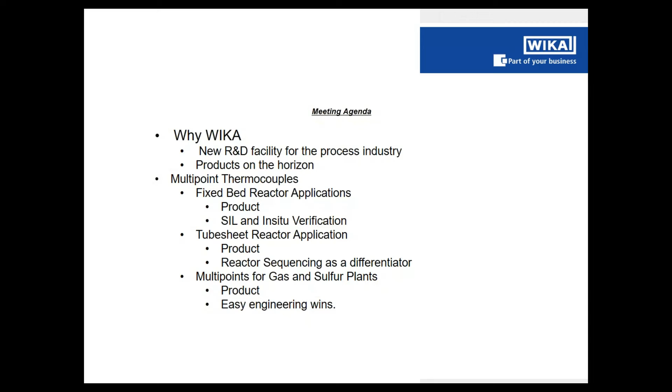Then we'll talk about a product line, the tube sheet reactor application, multi-points for those, which tend to be very prevalent in a lot of our chemical applications, and the things that need to be thought about and why we can do that pretty well. Then I'll end with an easy one, multi-points for gas and sulfur plants, specifically amine. There's one we do that's really easy, and especially if you have some young engineers and happen to have an amine plant attached, there's an energy efficiency project we can put together for a quick, easy engineering win for those folks.

So just a recap - a lot of you will know WIKA. WIKA is one of the largest instrumentation manufacturers in the world. Certainly we're known for mechanical pressure gauges, but also have significant lines in temperature, level, flow, force, and now density. I'm with the temperature division, and that's where my level of expertise is. I can talk a little to the other ones, but temperature is really my specialty.

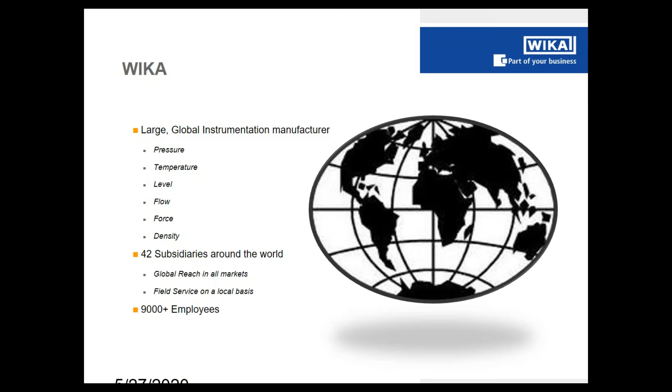We are a global organization, lots of subsidiaries around the world - 42 subsidiaries, 75 offices around the world, more than 9,000 employees. So we have a lot of resources in a lot of spots to draw upon, and that means we have a very substantial presence here in the Americas. So anything we can't handle, we have lots of friends around the world that can add capacity to allow us to do so.

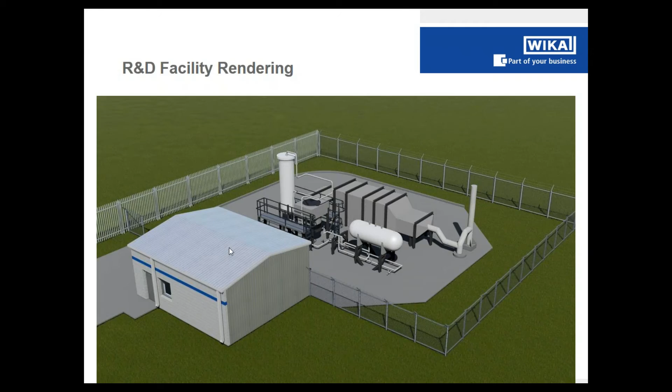We do probably 30 to 40 turnarounds a year. We'll run Monday, come down Tuesday, do some analysis, and do another test Wednesday, Thursday. So we're really able to do some interesting things.

We'll be doing a lot of work on problem installations and common mistakes. We get a lot of calls from customers saying, 'Hey, I did this myself, I know I did it wrong, how bad is it?' And right now my answer is usually, 'Oh, that's bad,' which isn't very helpful. What you'd like to know, especially when we're talking about temperature, is whether it's a 10-degree error or a 100-degree error. Can I live with it, or do I need to do something about it? With this unit, we're going to recreate those scenarios over a variety of heat fluxes and operating conditions, so when you call, we can matrix that and say, okay, under similar conditions we got 26 degrees, to help you make better decisions.

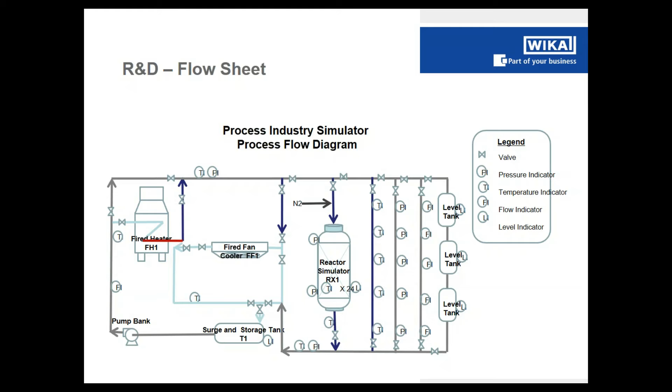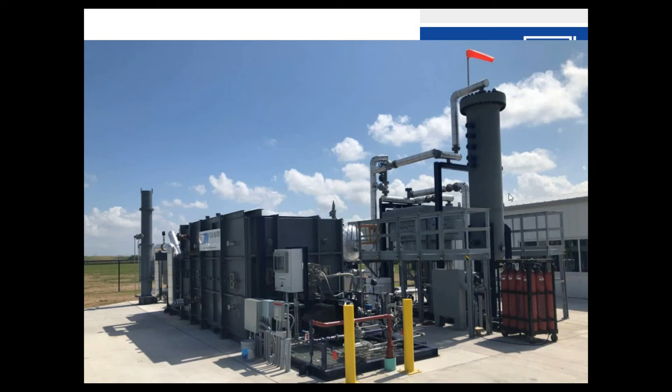Here you can see the reactor skid and the fixed bed before it got insulated. This is a side view of that heater. Again, Tulsa Heater was a partner, and here is our heat transfer fluid that we run through it - we actually boil oil, and Dow is a partner. We use the high temperature heat transfer fluid from Dow, who helped us out with that. We had a lot of really good, talented people add their expertise to make this a very efficient unit.

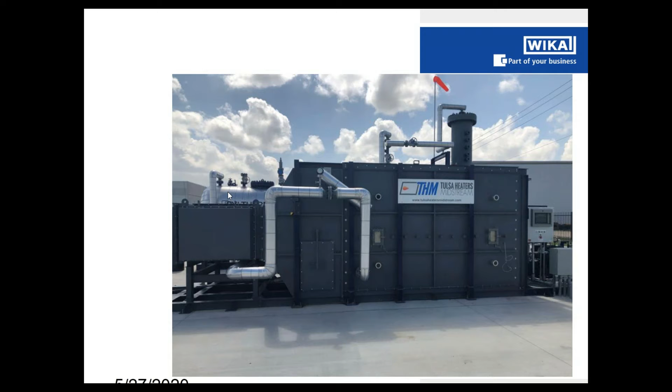And we are looking for partners. We don't do full utilization of this unit - certainly we've got a lot of tests that we do, but if this is something that could be useful to you or your company, and you'd be interested in talking about a test, please get in touch with me, or get in touch with Rick. He can put you in touch with me as well, and let's discuss it, because we're looking at advancing not only our knowledge, but knowledge in the industry. You know, this kind of stuff benefits us all.

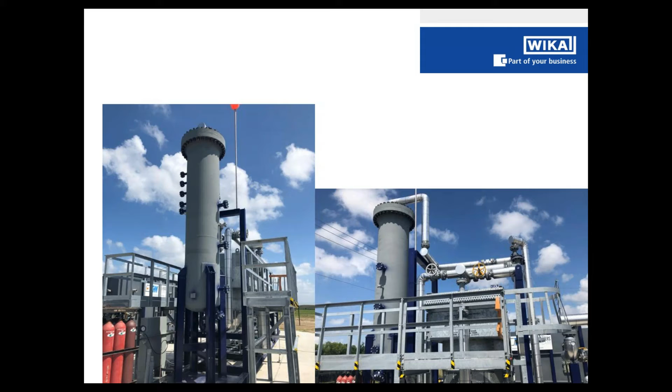Coming to you right now, we're doing a lot of work on external skins, both welded versions and removable. We've got some great things coming out in the next 6 to 18 months—multipoints we're going to talk about today, plus some new ones on the books. We're also actively doing furnace products, and we have some really cool papers coming out on benchmarking standards and performance of some products, as well as new ones. It's an exciting area for WIKA in the next 6 to 18 months. You'll see some papers first, then products to fit very specific applications—tailored to applications that need something special.

So that's kind of different—an instrument company running a process unit—but we needed to be able to back up these claims, and this is directly from the owner of the company: you say you're a world leader, what are you doing to prove that? So he gave us a lot of money for an R&D facility so we could say, okay, we can now back that up. We've been doing hydroprocessing reactor temperature measurement when we talk about multipoints for a long time—actually getting close to 30 years.

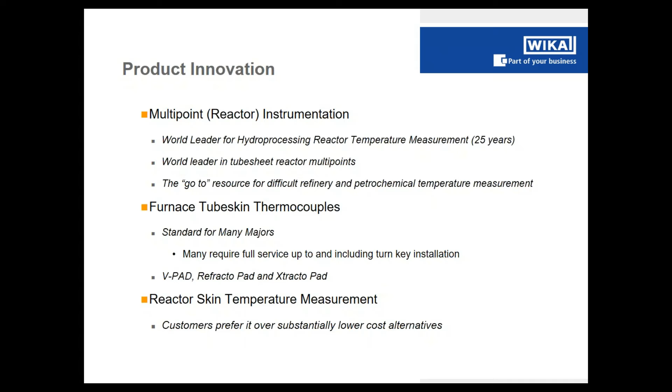When we talk about engineered solutions—which is really what I deal with—that means custom-made temperature measurement solutions. There are a bunch of keys to success, and the first is you've got to make the right kind of product. There are some interesting nuances here; a lot of people believe they can do this, and some can. But you also need to fully understand the second part, which is the application fit. These go hand in hand, because you've got to make the product work, and you also have to make it go into the unit the right way. It has to be properly installed, because we can build and design the right thing, but if it's not installed correctly, everybody's still unhappy.

To get all this right, we spend a lot of time training our people not only on product knowledge but also on application knowledge—so we ask a lot more questions than most. We also work a lot on client knowledge. There are many different ways to solve any problem, and specific organizations have preferences, which we understand. If you're dealing with licensors or engineering companies that have been doing this for a while, they may have a particular pathway they want to go, and we can help with that because we know how to navigate and mesh those differences.

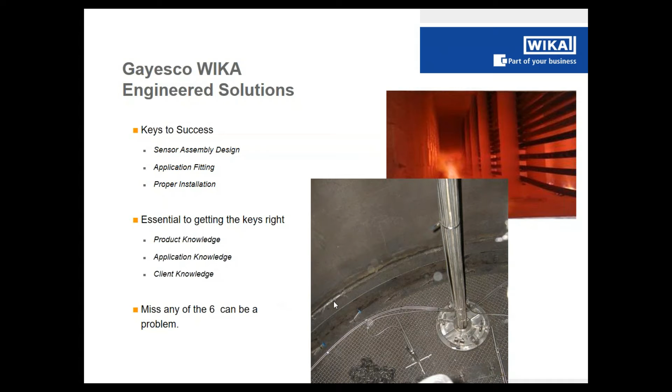Multipoints aren't the only thing you find in a reactor. On the right side, thermocouple thermowells are still in use - pipe wells and tubing wells, and the pipe well could be vertical or horizontal. And then there are modern thermocouples, either linear thermocouples with multiple junctions in a single sheath, or individual thermocouples that come out and are bent to individual pieces. At WIKA, we still make all of these. They all have application, and we do specialty variations of all of these. So if you have need, again, this isn't just about multipoints, but we can do the other pieces as well.

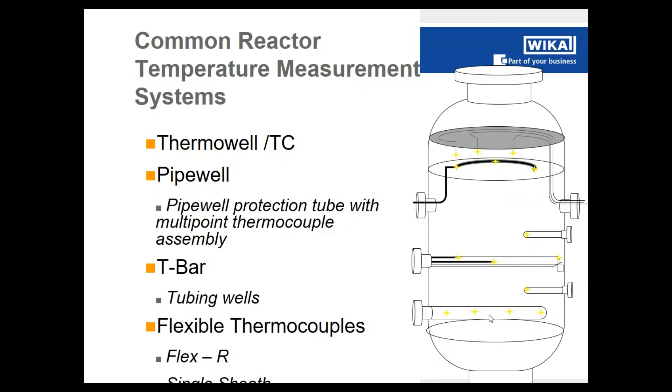One of the reasons multipoints became popular, especially in bigger reactors where we had pipe wells - the pipe well has a very specific geometry where you've got a pipe with temperature measurements on the inside as a protection well. You're kind of limited to wherever that pipe is - that's where you can measure. So there are big sections you miss, and there's also a lot of metal mass involved in this system, so it takes a long time to heat up that metal and all the associated pieces. The response time tends to be a little bit slow. For some reactors this is still the best solution, but in places where new catalysts are coming out, they're more reactive, more active. Sometimes you need something that can give you more information, and that's where we're running to.

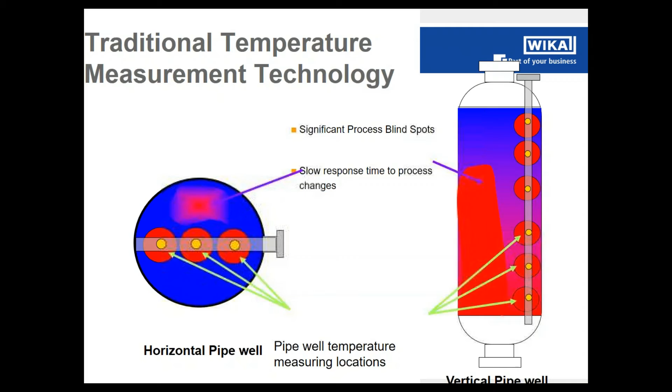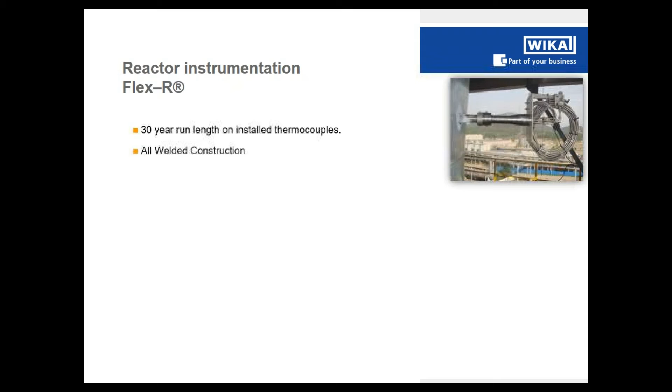When we talk about modern instrumentation, we refer to that as a Flex-R - we've been doing this for a very long time. We use an all-welded construction because of the environments we go into, to make it as durable as possible. It's heavy-walled, large conductor, engineered thermocouples. We provide specialty seal chambers that are high performance, low volume, and then we provide seals on the thermocouples themselves as an additional safety measure. We've done everything from 1 to a little more than 80 sheaths in one assembly.

Here's a very traditional assembly, a weld neck flange. Here's the seal chamber itself, the valve and detection port, and the tail end of the thermocouples, where we get hit to the junction box, and here's the thermocouples going away. Here's a more unusual one - this is designed for Chevron licenses with a specialty coupling. You can see this is only 4 points, and then a remote mounts head. This is armored lead wire - a whole gamut of different types. And here you can see some of the installation pictures, and we're going to see a bunch of those. So we do a bunch of different designs, but again, this is why it's engineered solutions, because we tailor fit to what the application needs are.

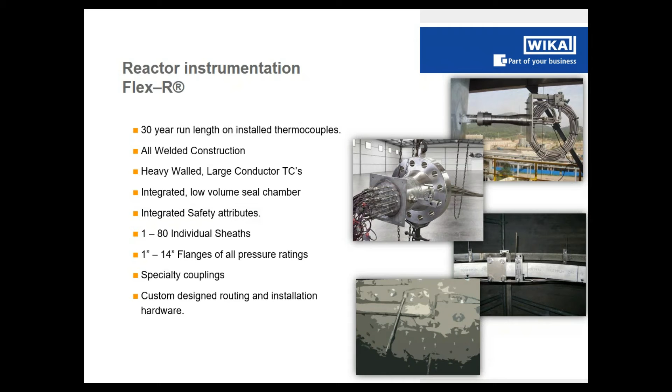Here's a smaller assembly, very much like the last one. There's that weld neck flange, and here's my seal chamber. You can see it's very low profile, but designed. This will handle 4,000, 5,000 PSIG at reactor temperature, so 800 to 900 degrees Fahrenheit. And then here are your thermocouples at the top. Similar ones here - again, they all look a little bit different, but the basic parts tend to be very much the same.

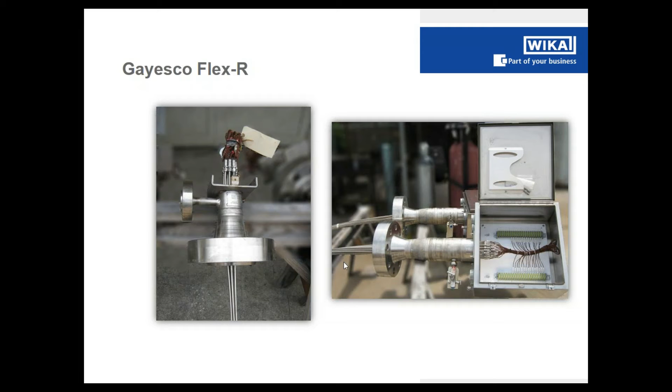So when we do these, I mentioned engineered cable. With thermocouples, we've known for a long time, bigger is better - you want it to last a long time, put a bigger thermocouple. But that's not really the case. What we're looking for is bigger conductors. The conductors are really where the life of the thermocouple, certainly on the electrical side, comes from. So what we do is have a specially made cable where we maximize the size of the conductors. We've been doing this for a long time and get some tremendous performance out of these.

In our design, we actually make one of the legs bigger than the other because that problem leg needs a little bit more help to make it more durable, and these will easily give a reading for 30 years in service, which again can be a little bit crazy, but these were designed to be very, very durable. We also go with a very, very heavy wall thermocouple, which allows us to do that all-welded design.

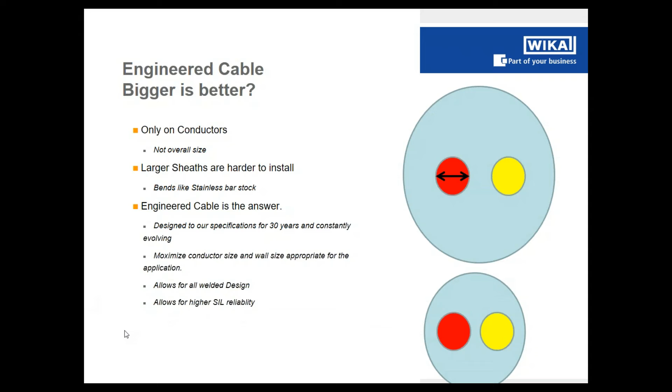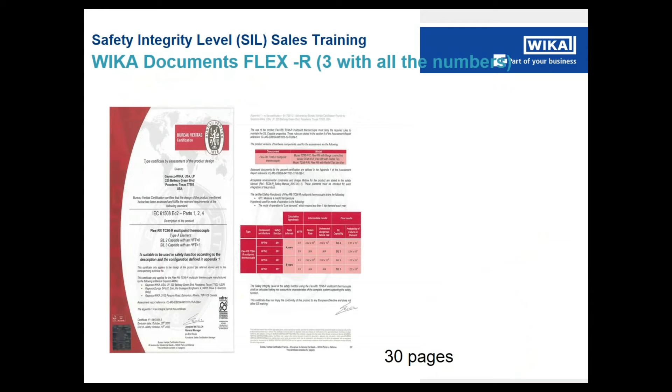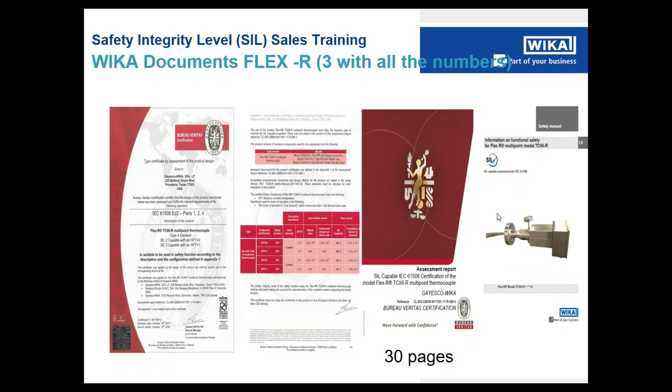This special construction allows us to go to different numbers for SIL rather than the standard thermocouple charts. What we did was we actually went out to a third party - BV did an analysis of every thermocouple we had as a multi-point, and put together this for us. So we did not self-certify, but these are certificates for our SIL numbers. We can do SIL 2 and SIL 3 - SIL 3 obviously requires the right architecture, and all the numbers that you would need are involved in the certificate. We also have a full assessment report showing how those numbers are arrived at, that any of your safety people can have, as well as a safety manual that includes the operating instructions as well as the numbers as well.

When we talk about SIL, the guys that deal with transmitters know you've got to check all your parts periodically. There's a required proof test, and as we got talking with BV and some of the other experts at Exida and TUV, they said thermocouples, we get how we can detect some problems, a short or a loss of signal, but when you get decalibration, what can that do? The fear was if we got decalibration, it could either mask a problem or show a problem that wasn't there, and that could be an issue for SIL.

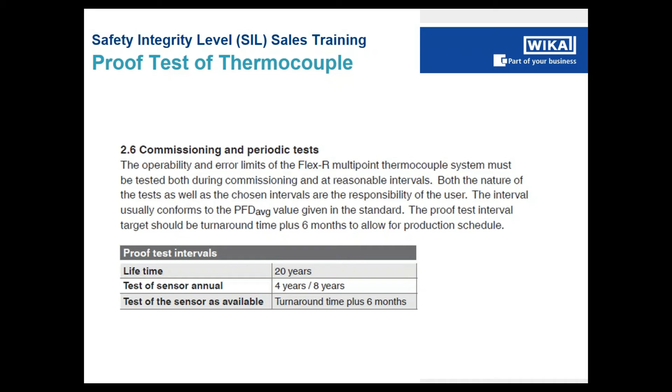So we did our math and came up with a proof test interval of 4 and 8 years, because that often coincides with the unit turnaround. And then we developed a way to actually go and re-verify the thermocouple accuracy in situ.

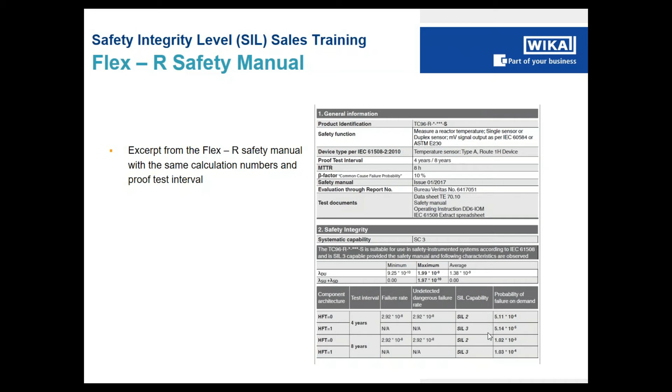This is a quick table out of the operating manual, the safety manual. You can see all the numbers, and here's our probability of failure on demand. The PFD numbers are all listed out, certainly numbers for 4 and 8 years. The end user is always responsible for the math, but you can use the math you need to make your system work.

Because the vessel is open, we can make changes. If you're not happy with the numbers, there's a variety of things that can be done to make sure you have the proper instrumentation when you start up and know exactly how it's going to perform. So this has become part of the SIL procedure, and it can be done during any installation or catalyst out time period in these fixed bed reactors. We also do this for a variety of other applications, liquid filled columns and other bits, but again at an appropriate turnaround.

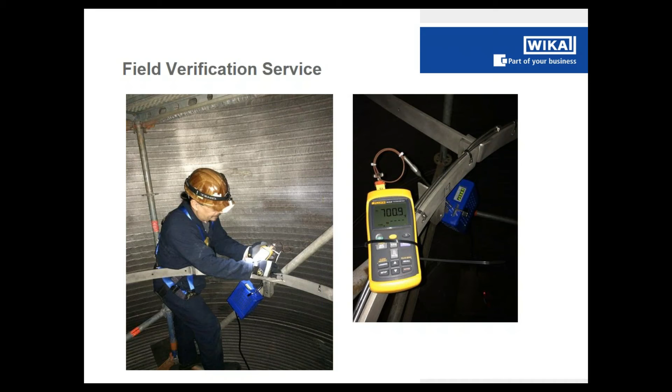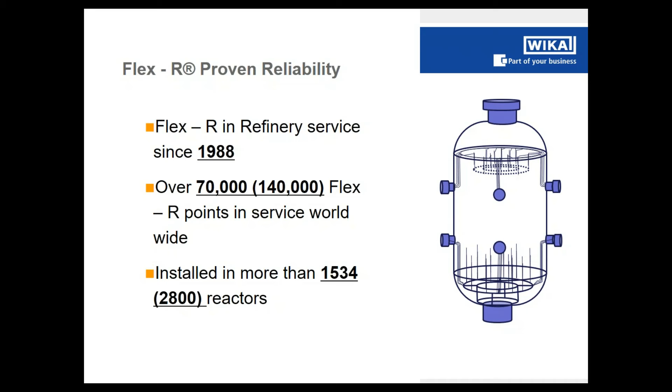So the first ones went in in 1988. Since then, we've done about 140,000 points in service, and we're shy of 3,000 reactors, but we're getting up there. You can see we've done this a lot. Now I have slightly lower numbers also up there, the 70,000 and the 1534, because that's where I had created this table some years ago. But again, the experience list is very much the same.

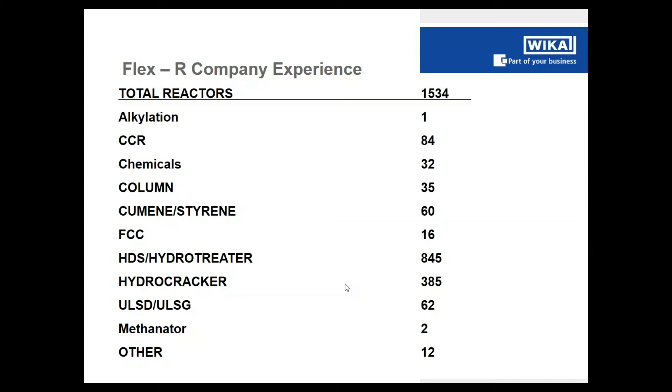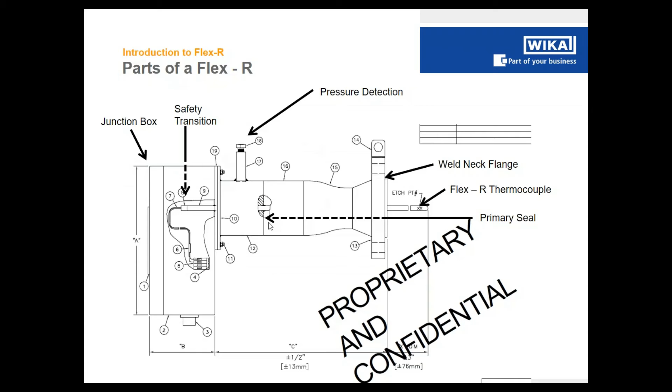These are the general parts of a multi-point that we provide: weld neck flange, sometimes a concentric reducer, pup piece, and then the seal chamber itself up here. We're welded on the front and the back. Everything is connected to a pressure detection port out the side or out the top, and then a box that can be mounted either directly on with a standoff or as a remote mount. Again, these are just the basic pieces, but gives you a very good flavor of what they all generally look like.

Again, you can kick these and they'll bend a little bit, you bend them back. They are designed to be quite durable and have lasted, again, for 30 years in these type of applications.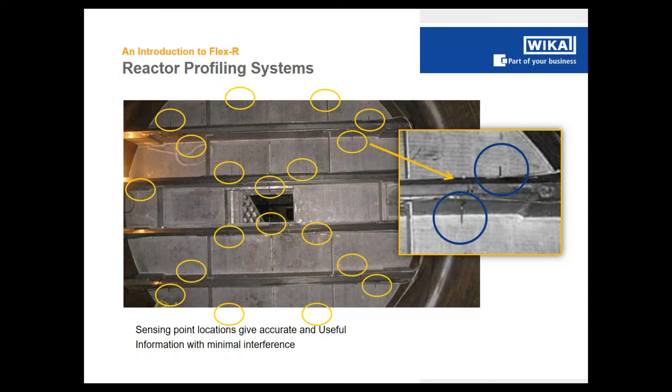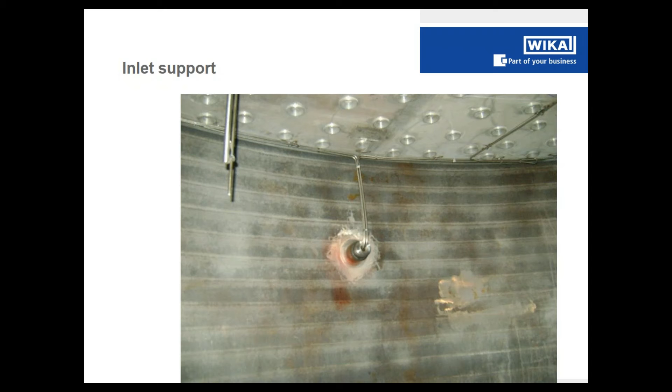And here's a very common side arm. Sometimes we can weld to the reactor. You can see there's a cladding and a bolted up piece. And here is the thermocouple coming up. You'll notice that the thermocouple is away from the arm.

One of the rules of thumb for thermocouples is you want to be 8 to 12 thermocouple diameters in contact with what you want to measure, or 8 to 12 thermocouple diameters away from what you don't want to measure. So in this case, this is an 8 mm thermocouple, or about a 5/16 inch thermocouple. I have deflected this about 4 inches away so that I don't heat sink off of this attachment. You don't want the arm measurement, you want the measurement of the process that's up here. So this is a rule of thumb you'll see in a lot of the installations to make sure that the measurement accuracy is still being maintained.

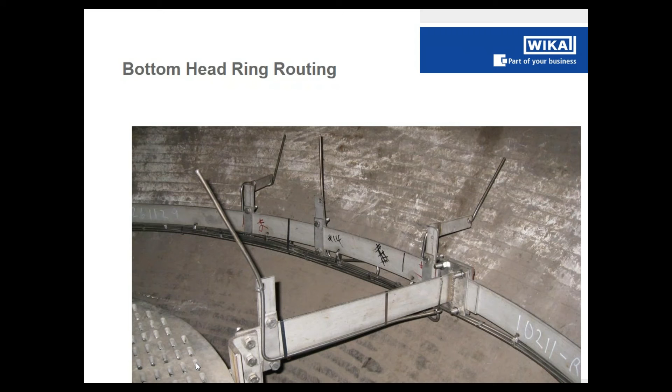And then here is another shot. We looked at the top of some of those beams. Here's from the side. Thermocouples coming in, coming out and around, out to the points. And again, here's one of those expansion loops where we came out and then back down to this thermocouple. Anything that had been in a way that they would have had to gone around would have eaten up with this loop, and that's what it's for, to make sure that there are no delays during an installation that would put you off time.

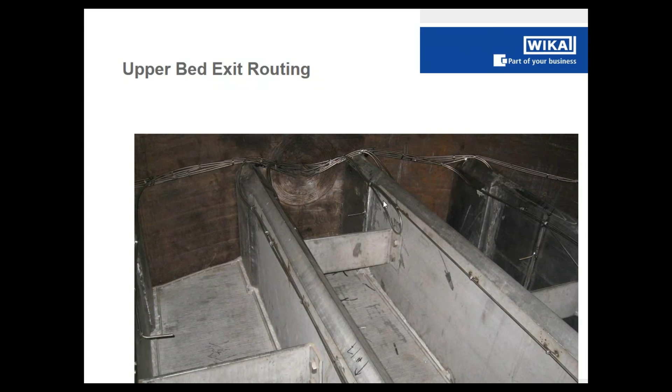Hey, Robert. Yes, sir. We do have a question regarding reactor bed measurements, if you want to hit it right now. Yes, go ahead.

It is common on process temperature measurements to use dual thermocouples within the same well. I know it is possible to do the same with furnace tube skin measurement, but is it recommended, not recommended, or null? Is it an option on reactor bed measurements?

So a bunch of questions there. Let me try to hit that up. All of us manufacturers have access to dual thermocouples, and there also are triplex thermocouples, but you really don't see that used very often. When we're talking about single thermocouples, remember, the more thermocouples or more wires I put into a sheath, the smaller those wires end up being. So bigger is better.

In both the reactor and the furnace, there are occasionally people that will call for duals, more often in the reactor than in the furnace. So that is completely possible.

Sometimes people want dedicated wires going out to maybe safety for one set and information or control for another set. Those are done. When we talk about the 8 mm thermocouple or the 5/16 inch thermocouple, I do a 15-16 gauge wire pair for the single. Because the wire space is reduced for the duals, it goes down to about an 18 gauge. Again, it's pretty substantial, but very workable.

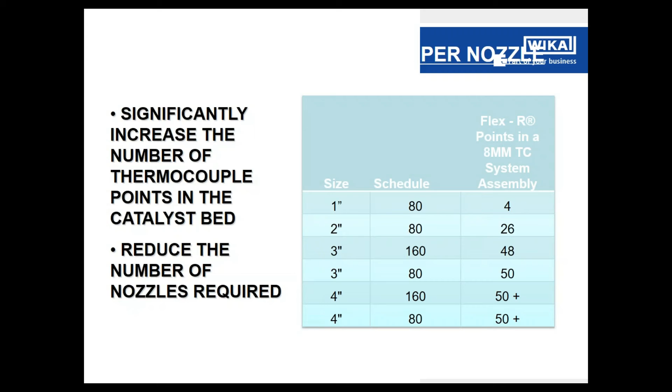All right, so we talked originally about the response time, and we talked about pipe wells, and I said there's a lot of metal mass. When I was doing catalyst installations and catalyst startups during reductions, certainly as a process engineer, I'm like, okay, well, instrumentation is always accurate and instantaneous. And I just heard all the I&E guys groan, right? Because they know that's not true. But that's not always, you know, as a process guy, we didn't always know that. And these are good rules of thumb.

For the thermocouple thermowell systems, we'll often use a throwdown of about a 60-second response time, and that's to that first step change. This is an industry standard. Obviously, it varies by thermocouple type and thermowell type, and the amount of metal mass.

But if you're looking for just a good rule of thumb, that's not a bad throwdown number. The pipe wells, we look at the old heat transfer block or button and guide tube. A lot of metal that has to be heated up. That's about a 3 minute to that first step change. Now remember, that's the 63%. To get the full temperature range, it's about 4 or 5 times this. So you're looking at about 15 minutes to see the full temperature rise go through.

Some of the more modern versions, we call it Flex-O, which is a bimetallic strip pipe well. Reduce the metal mass, gets that back down to about 60 seconds. The modern thermocouples, because we get rid of the pipe well and you're just using that heavy wall thermocouple, the single sheath, we can get down to about 16 seconds. The Flex-R is 4 seconds for grounded, 8 seconds for ungrounded.

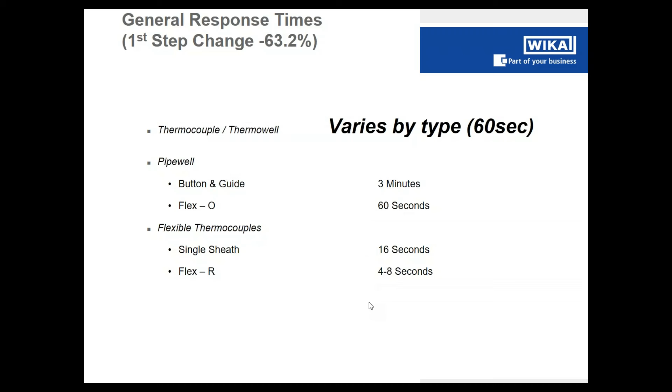So this allows for a lot more response time, especially as you move to making your systems more active and more reactive. And this is really what drove the development of the Flex-R. At the end of the 80s, a lot of zeolitic catalysts that were very active came out, and you can melt the reactor in about 15 minutes.

Certainly you needed to have your operators know about it farther and farther in advance. And this, again, you can see under 30 seconds, that guy has an alarm and the ability to make a decision if it's not already part of the automatic depressurization system.

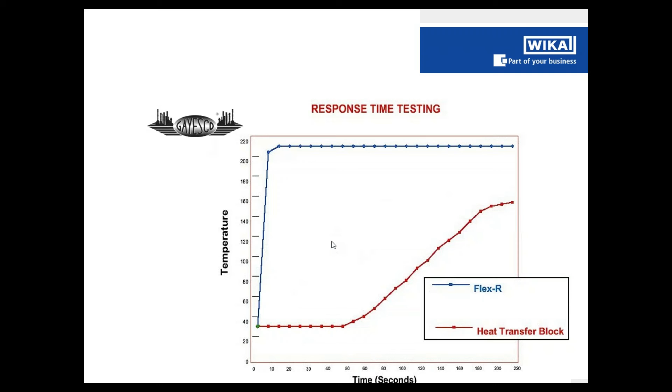We tend to do a lot of tests, and that's to ensure the product is exactly what you need in service. The cable comes in and we do a bunch of tests on it - our suppliers, both internally and externally. We do actually have an MI cable manufacturer that makes some of our cable, and then we get a lot from some trusted suppliers that we've had for more than 30 years.

They do a lot of the tests, so they'll actually look at a calibration on the equipment, and then we'll look at it to make sure it's in the right category. And then we do a bunch of function tests, installation tests, X-rays, before we even assemble it into the multipoint. Once it's in the multipoint, we do pneumatic and hydrostatic tests, because a lot of these are in pressure situations, as well as dye pen and X-ray.

And then now, as you saw, we've added the in situ verification. So once it's been shipped and bent and unbent and installed, you get a final verification of how that product is going to perform in your vessel itself.

All of these are available if we're doing a project for you and you want to come watch them, or have a designated inspector come see those. Happy to do that, arrange that with a project manager. Love to have you guys down.

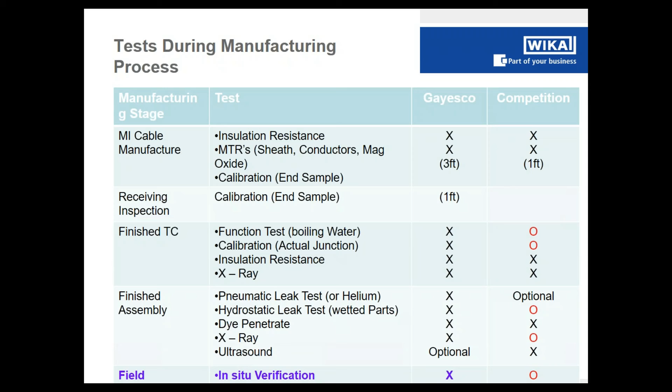Now, for those of you that have some of these, what are people doing? Well, really, we're looking at operating the reactor. We're trying to keep it below catalyst problem temperatures as well as metal temperatures in the reactor. But then also sometimes you're saying, how well am I doing? Can I look at maldistribution?

And there are a bunch of different ways here. You can see guys like Tracerco and some of the others provide radioactive tracers. There's a bunch of records evaluations you can do. But if you have enough thermocouples in there, you don't need to call anybody out. You actually have all the equipment that you need.

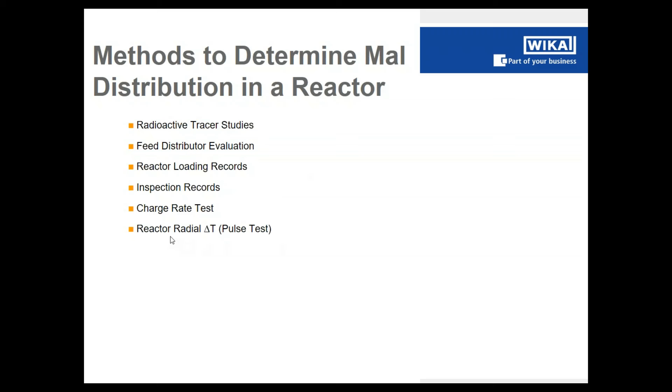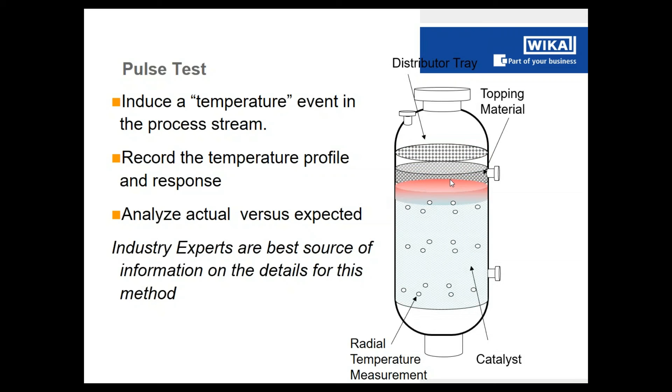And if we talk about a pulse test, just a single bed reactor here with a bunch of thermocouples in it, some catalyst, a distributor tray, some topping material - this is a very simplified reactor, but you have all this already. So what you do is you induce a slight temperature bobble in your process, and then you watch how the temperatures move through the reactor, vary radially, and then how they vary across the gradient, as well as the time that it takes to get there.

Once you know the variation and the time it takes to get from one level to another, of the temperature change, you actually have everything you need for a flow map. You don't have to go out to anybody else - this is something your process engineers can do to ensure the loading was right, and whether any of the internals are causing issues. With enough thermocouples, I've seen guys recognize there were hard hats inadvertently left in the reactor, or the loading was dished or mounded. Anything causing you not to get maximum performance, you can actually find out.

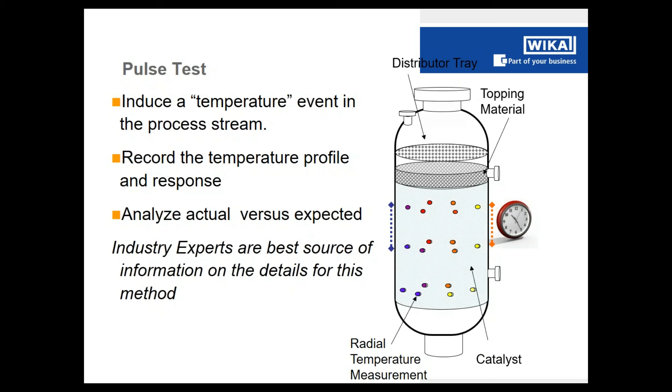So this becomes a really nifty tool once you have the thermocouples. Now the thermocouple here, you can see we provide a regular thermocouple, although it is beefy and designed for the application, and then we add a fitting at the back. This is a standard Swagelok fitting that our transition is made out of - not the normal tubing. This is designed to hold pressure.

What you can do is cut these wires, spin on a standard Swagelok cap, and you've maintained the integrity of the reactor. The multipoints, the linear multipoints, you can't do that - there's too many wires, this is made out of tubing. If you try to cap this, generally it'll explode. You have to manually cut this off and then seal it back here. So this is only available on the individual thermocouples.

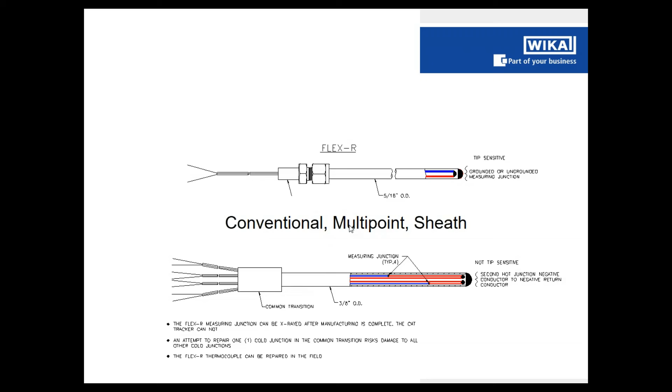But that only happens if there's damage to the thermocouple, and the damage tends to be made during a turnaround - welding, grinding, shearing events. If somebody tells us, because these are so big, we actually can weld a splice back together instead of having to order a new unit, which could take weeks, or send it back to the factory for repair, or send a technician out.

The pieces can be identified. Remember, these are 15, 16 gauge wires, so they're very easy and large to identify. The wires are reattached, magnesium oxide is packed back in, and an oversheath is drawn over the top and welded at one end, heated up to drive off the moisture and cure the insulator, and then weld the top end. We've had these running for more than 15 years.

Once we get done, we actually do that in-situ verification to verify exactly what you're getting, so that this is correct and accurate before those technicians leave and you start up the reactor. So it doesn't happen very often.

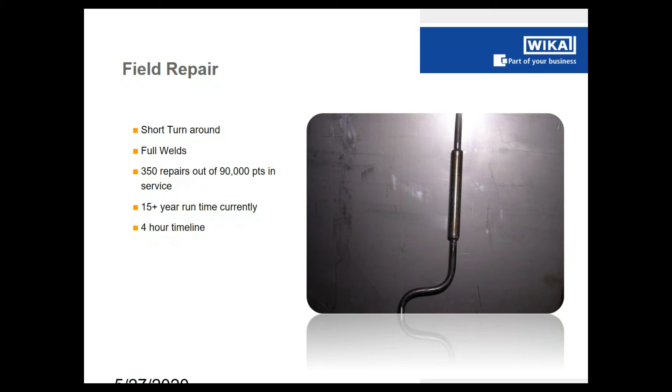At that point, we had 90,000 points - I think we've done about 450 of these now. So again, when you're talking about 150,000 points, 140,000 points, it doesn't happen very often. But if it's yours, you don't care how often it happens - you just want to know there's a solution path to fix it. And we thought that through. We have one of those. It's tried and tested.

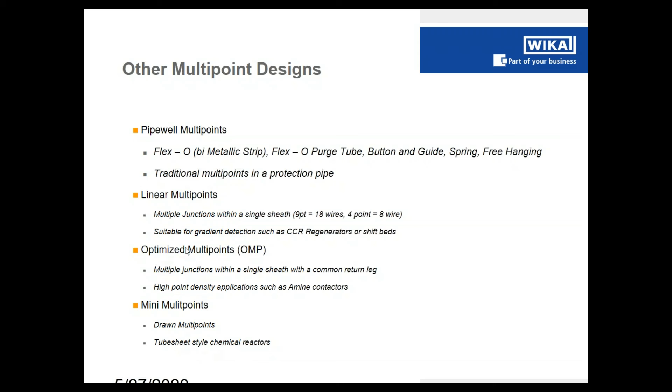So that's kind of the fixed beds. The modern ones, again, like I said, we make the pipe wells, we make the linears. We're going to talk now a little bit about mini multipoints and optimized multipoints, which are very popular in chemical applications. So let's talk about tube sheets real quick.

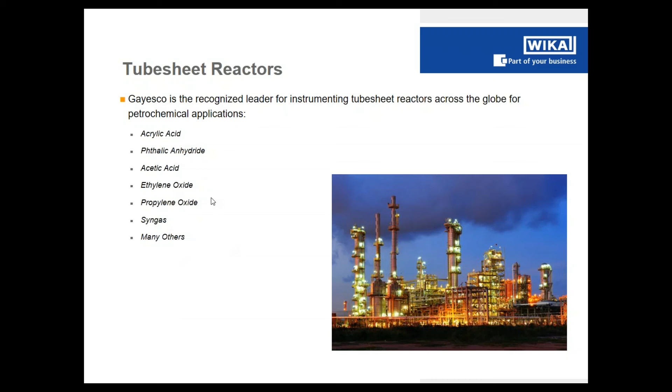You'll see us do a tremendous amount of the acrylic acid reactors around - phthalic anhydride, acetic acid, ethylene, propylene, syngas. You'll see us in a bunch of those. So a good experience and history.

Again, when we talk about tube sheets, like acrylic acid, we've been doing this for more than 20 years. We did the largest train in the world in Saudi Arabia - I think there were more than 1,600 measurement points. And typically we're doing that with mini multipoints or OMPs or traversing pipe wells.

And then if you think about this, these tube sheets, essentially an SMR is the same thing. It's a furnace environment, but we've been doing SMR measurements for quite some time, even at those extreme steam methane reforming temperatures, because their equilibrium temperature is 1550 Fahrenheit.

We get 10 plus years if we do it right. We're able to get out and do fixes for people, and Chevron, Praxair, Air Liquide, a host of others.

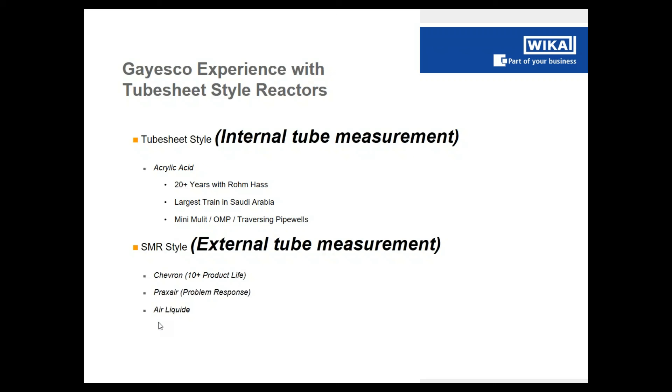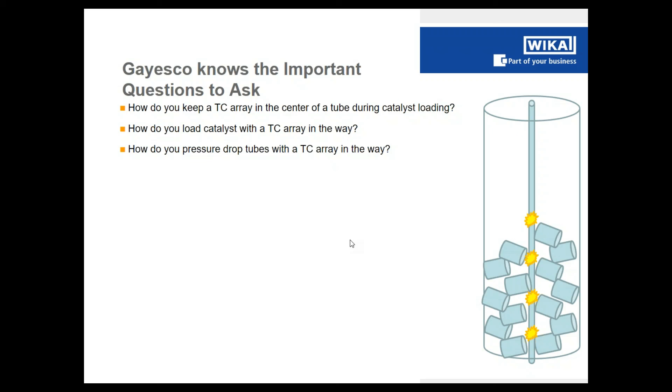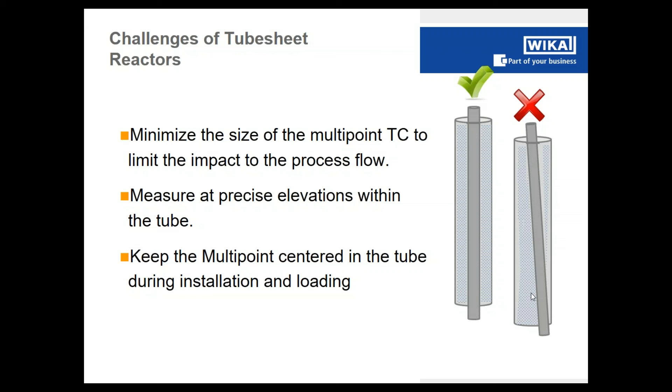We've done that. So when we talk about tube sheet reactors, and these are tubes filled with catalyst, some of the questions that come up, because this now is not trivial: How do you keep the thermocouple array in the middle of the tube during loading? How do you load catalyst when now I've got a thermocouple in the way? Because that's not normal for your tubes. And then how do I verify that this is accurate, maybe with a pressure drop test, if the thermocouple's in the way. And of course, when we're measuring, we want that thermocouple to stay in the center the whole way, because if it tends to get off center, I can have some areas that can be problematic in that tube.

So here, if we look at a fixed tube sheet reactor, right, so a bunch of tubes. Here's the top of the tube sheet, here's the bottom, very much like an exchanger, kind of upright. Process is going to come in here, go through the tubes, do a reaction, and there's a media that's in here, either heating or cooling, depending on what type it is.

How this all goes together becomes really important, because you take the top head off, sometimes you take the bottom head off. Well, if my nozzle is attached to this top head, I can't have it in place to put the thermocouple in. That becomes a problem. So how do I do that? A lot of people will solve that by putting an extra little pup piece, some piping, so that I can have a nozzle out the side.

But now I've got to protect the thermocouples as they go to the individual tubes, and a lot of times we're going to do that with a guide tube. There are other ways to make it come out the top head - we've done internal flanges, specialty seals. But thinking through the sequence: I've got to put the thermocouple in, then I've got to load catalyst, then I've got to pressure drop it, then I've got to put the top back on - that's something you don't find with a thermocouple thermowell.

This is unique to these, and we've done a lot of work to make this doable. We've actually created specialty equipment to center the thermocouple during loading and to allow for the pressure drop. You can do a variety of different things - there can be spiders, there can be some metal spikes on the thermocouples to keep them in the middle. Generally we try to avoid those because they may lead to your catalyst bridging and not falling all the way through the tube.

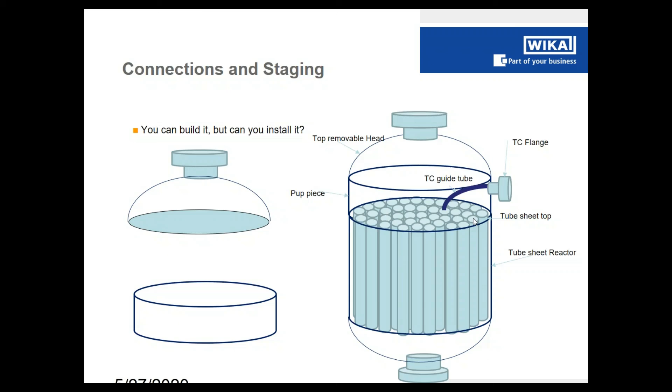So again, we know how to maximize the points. We work with the installation crews to make sure this can all be done, and that you can do all the things that you need to do in the application. Again, it's that whole philosophy - temperature measurement isn't the most important thing for you. You need it, but those vessels have to do some really important things, and we need to be able to work within the constraints of what you need to do.

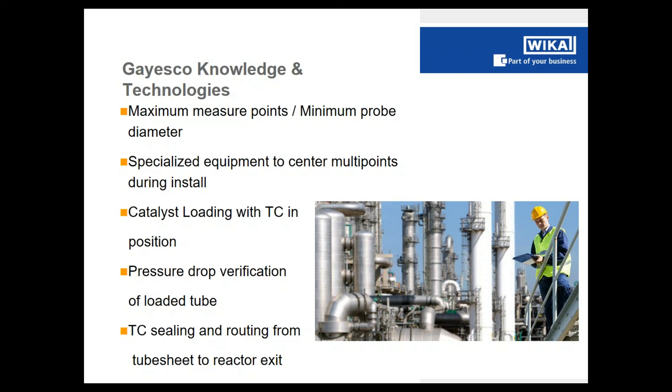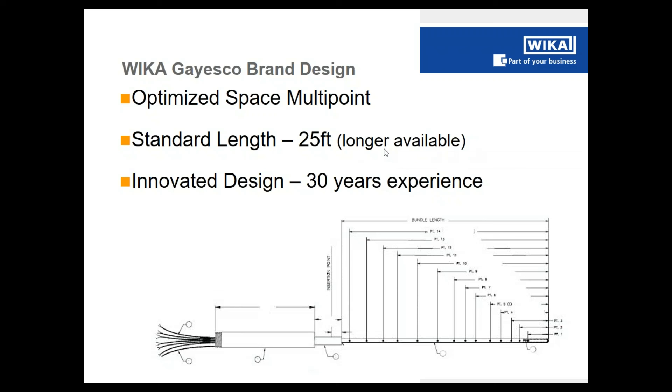The multi-points are pretty easy. Again, a bunch of either small thermocouples inside an outer sheath, or multiple wires in here that are all connected at different elevations. Typically you'll see them up to about 25 feet, but certainly longer ones are available - lead times can get a little bit longer on those, but these are more available. And then sizing, you'll see in these, it's not uncommon to be kind of in this range on sizing, although it can get much smaller if required.

But now we need to talk about life and how that can go. And if we're dealing with individual thermocouples in an outer sheath, obviously .030s become quite easy, either grounded or ungrounded. As we get down below .030s, you can get down to .010s, but typically ungrounded becomes very difficult with those, so they tend to be grounded. So a lot of different varieties. 7 is the most common number of thermocouples in these because it's an ideal packing - one thermocouple with 6 around it and then an outer sheath.

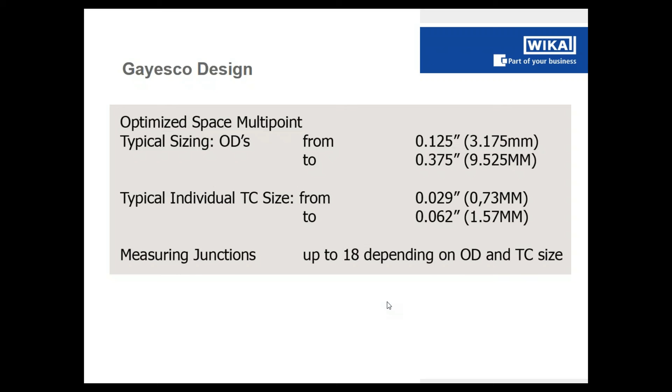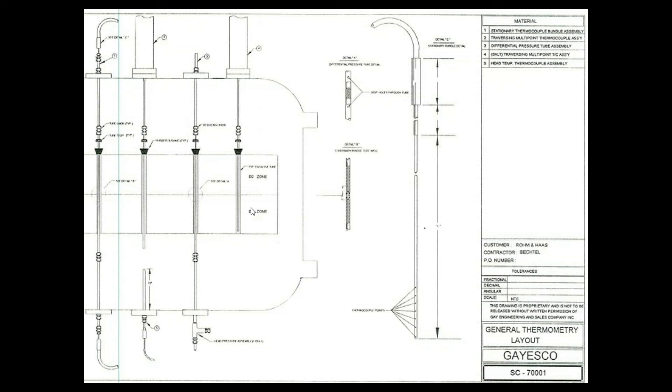Here's a drawing from one of those acrylic acid type reactors. In this case, there's a 7-pointer going in from the top, as well as a 7-pointer that goes in from the bottom. They're actually tensioned together so that there is no support hardware. Very interesting design here. Again, experience - we've been doing these for a long time.

Took a long time to get to this point. But in the days, we've also done in those reactors traversing thermocouples - the same kind of thermocouple, but with a motor actuated top. That could be a control out on the unit, as well as a control in the operating control room that allows you to have maybe 7 points that are fairly close together and optimize where you put them. They could be pushed farther into a tubing well to see temperatures farther into the reactor, or pulled farther out. Some people use these. This is another one of those options for you.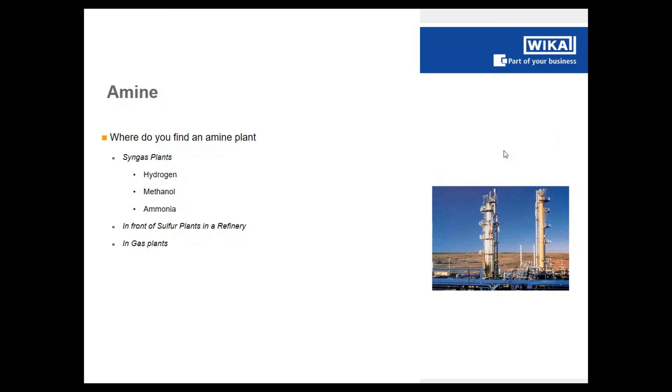Now, there is a heat of absorption that goes on here. And what we'd really like is that most of that absorption be about 1/3 of the way down the column. That allows the top of the column to be used for polishing. Problem is, a lot of these didn't have any instrumentation - they had an in and an out.

There was a Chevron facility that was seeing that operators would basically turn up the rate of the lean amine to make sure that this reaction was happening close to the bottom of the tower, which meant the stripper column was having to run harder. You're having to put more heat because you had more flow through to accomplish what it needed to do.

We came in through a bottom nozzle that was available, a less than 1-inch nozzle, and came up and did 21 points going up through these perforated contact trays. They were basically held on with little attachments at trays, and I think they measured every other tray in the column. You have to do this when you're retraying, because there is a way to fit it all up in an order that has to go on.